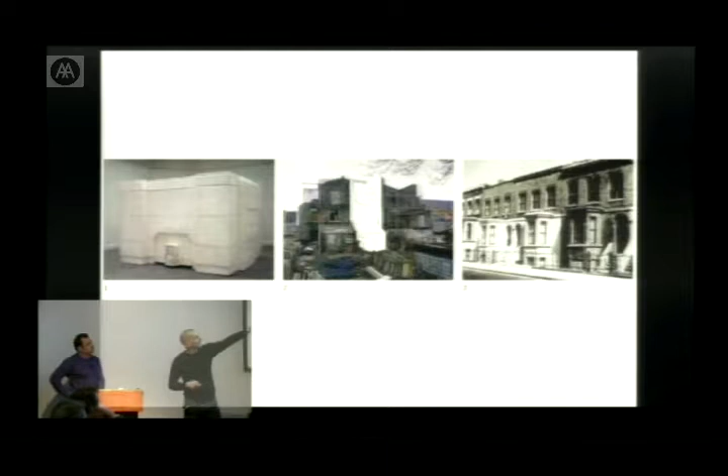That process took her 4.5 months to do with the room called Ghost. She wanted to do the same with the house. Eventually, Artangel found a house in a perfect location, which had originally been in a terrace street, you see on the right, and was now left in the middle of Victoria Park in northeast London, with the central house there intact. The one on the left-hand side was completely derelict, and in the one on the right, somebody was living.

They convinced the guy, they moved him out into new premises, and they got the council to agree that they could take on that central space to do this arts project. The difficulty was, they had 3 months to do it, and they had to get planning permission for a temporary project, and 3 months was what covered temporary planning.

So, having taken 4.5 months to do one room, the idea of building the same pieces, taking them away, stripping the house down, building a frame, and then putting them back together again was impossible. And we came up with the idea of something that I had discovered when I worked in the Middle East. When you get problems in concrete, you spray concrete onto it, called guniting, to repair the surface and then smooth it.

So we created some models for it. If you imagine, when you take away the outside of the building, the floors, there's nothing holding them together. So we had to come up with a system where the wall was skinned in concrete, the structure returned, and you connect it through bolts, so it's stiff. So that was the house, and they began to clean up the inside of the house, with scaffolding around the outside so they could prepare to do the building work.

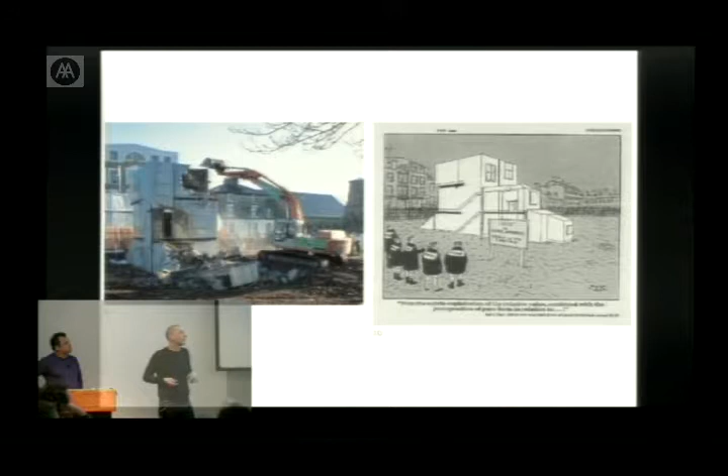So there you see, you don't really get the engineering. It's a thin shell. A lot of people thought it was solid. That was it when it was finished, and that's what it looks like now.

Another artist, Juan Munoz, who sadly died shortly after he completed this project, made the second installation at Tate Modern, which we were lucky enough to work with him on, called Double Bind. And what it did, rather beautifully I think, was create a series of 3 different layers, 3 different scenes. This one on the top surface, you see here, was using false perspective.

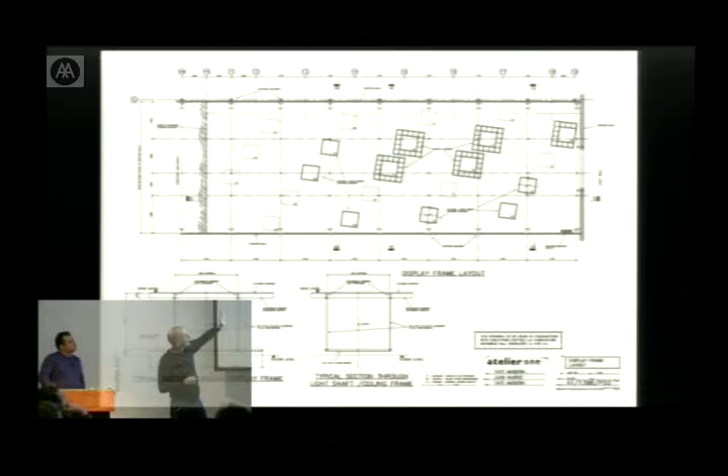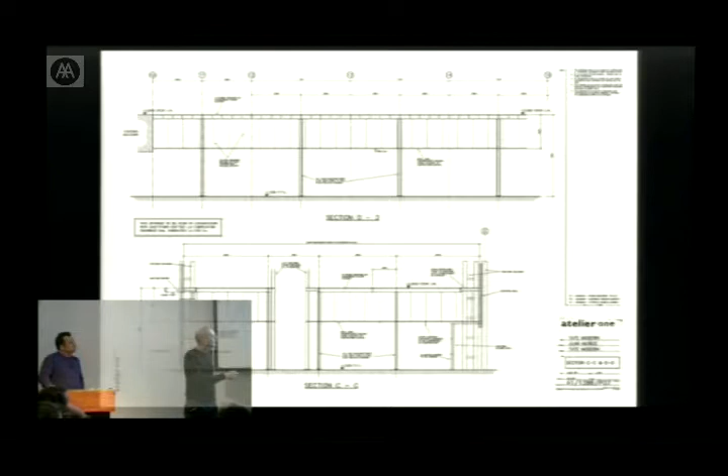Some of these are a series of holes which actually pass through a floor he created. Some of them are false and just painted on. And you can see at the back there, these 2 frames. They actually have lift cars that climb up and down the building. So you see the plan there that we developed with him with this false perspective. The section, you can read here: this is the upper level, this is the floor of Tate Modern, and this is the ceiling. So within this, he then created this other world.

One of the true holes through the floor. And he created these very, very strange worlds that you could see from the basement, the level below, which was very dark and very much like a car park. But these strange environments were very typical, an idea that went through all the work he did.

This is a project that we did with the artists Langlands and Bell. And what was great about it for us was the client put together teams of artists and engineers to develop three different bridges down at the Paddington Basin development. And we met up twice just to show various bits of work that we'd done and express our interest and experience in bridges.

And I think what was great for us is that, working with artists on a bridge, they had no preconceived ideas of what a bridge might be. We were doing structural diagrams of arches and masts and cables and that sort of thing. And they were drawing screens and looking at the filmic qualities of the space.

And so, this is the completed bridge, but I think one of the most important things for them was looking at the effects of the layers of the glass and how that could create moire effects, and how the people using the bridge could actually create shadows, which, depending on how it would light, would be enlarged across this screen. So it was an animated screen across the bridge.

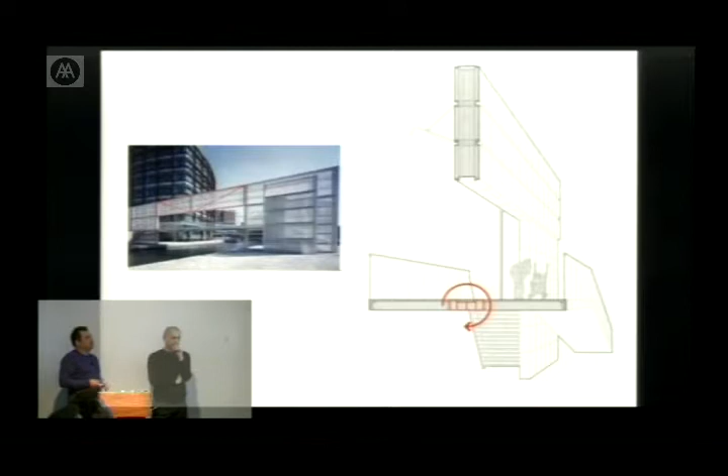And what we've hidden in the middle of that, you can see it's highlighted there in red, is just a series of very large tubes. They don't look big in the context of the bridge, but they're actually this sort of size. And that takes out any rotation. So the stiffness of everything, well, we were trying to hide it. And I think it is very beautiful, and it does screen off various areas of Paddington Basin.

For Mason's Yard, this was the second project we did for White Cube Gallery. When we got involved, it was an electrical substation in Piccadilly, and it already had a basement, and it had two floors at the time. And the original idea was to renovate the space, use the existing building for the gallery, just clear out the existing basement. It became clear fairly quickly that the spaces weren't big enough for the art that they wanted to display in there, and they consulted a number of the artists.

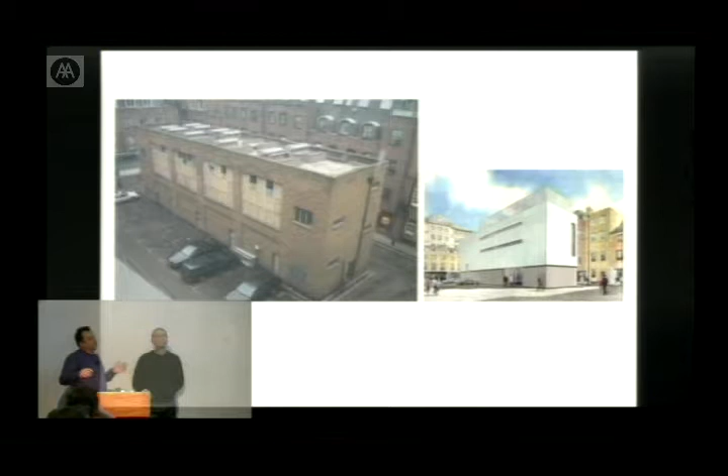They have a list of people like Damien Hirst and Antony Gormley and many well-known British artists on their books, and they're very careful in consulting all of them, to see what they think of the spaces and are they big enough, the heights, the proportions, and they actually build mock-ups of the spaces off Brick Lane in the warehouse there, just to make sure that everything's right.

This is the finished building. I think I'm right in saying it's the first new building in Piccadilly for 30 years. So planning took a very long time. The other difficulty with this is that the only route into Mason's Yard is the road that goes through, but the opening's about 8 feet wide and about 7 feet tall. So everything for that building had to slot through this little opening. So technically there were a lot of things going on.

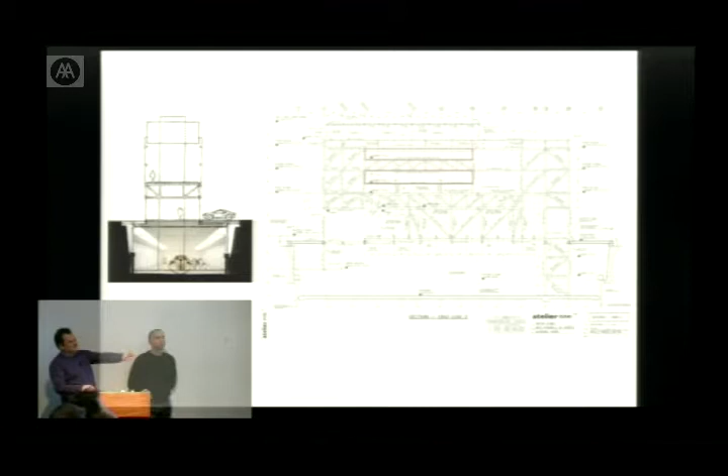So we had all sorts of steel trusses, you know, and these strange load paths that I think it was nicknamed the hockey stick truss for once. You know, it bends round corners and it was all over the place. But effectively, at the end of it, you can see on the left there that the road is hanging from the building. That was the only way we could do it, which is the first I've ever done, you know, something like that. So you don't really expect that. There's sort of all the cars' load going up the building and down through it, but that's what we had to do here.

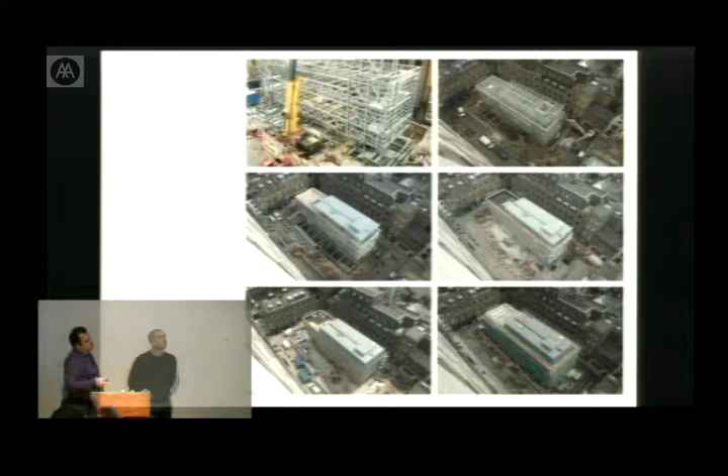So the sequence of it, I mean, there's a huge amount of steelwork in it, and these are the sort of time lapse as it was put up. I mean, it was a big, heavy engineering project. This is the basement on the left, and the existing basement wasn't deep enough. The width was increased and the depth, and so you can see we needed all this temporary steelwork to prop the sides of it while they piled down and excavated even deeper.

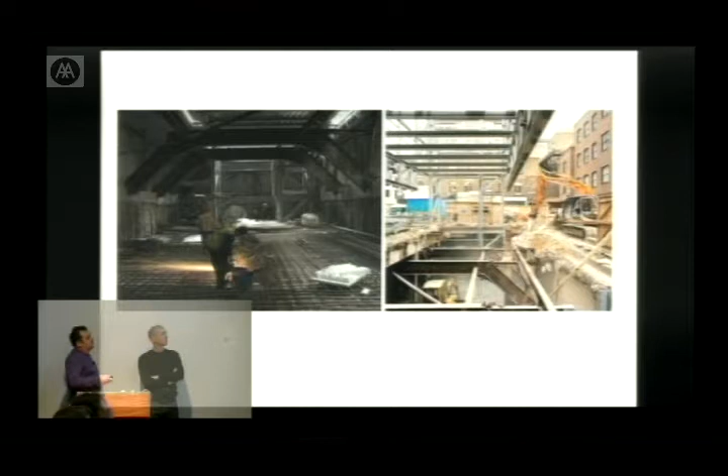And on the right, you can see that's the sort of, if you like, the clear elevation. That's where the road goes back in. So once the road goes back in, it hangs from this edge you see on the right. And that's the finished space. And it's quite extraordinary, actually. When you go there, you walk in the front door of this quite slender building, and you go down the stairs, and it opens up into this space, and it's slightly disorientating. But, you know, that's what's behind it.

I mean, if you imagine this thing ultimately is going to be in bronze, we need to understand the distribution of the weight, and it's a three-dimensional form, a kind of amorphous three-dimensional form. So we sliced it up into little pieces and then applied a weight to each of those pieces, which allowed us the correct distribution. That also gave them a mechanism to form effectively the base model, the former for the baby.

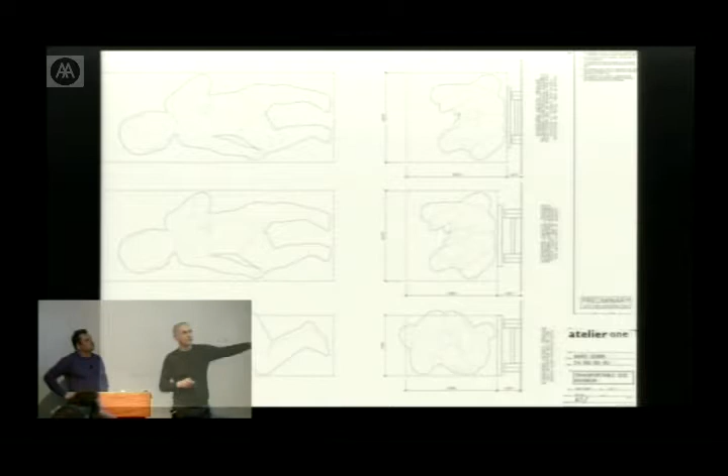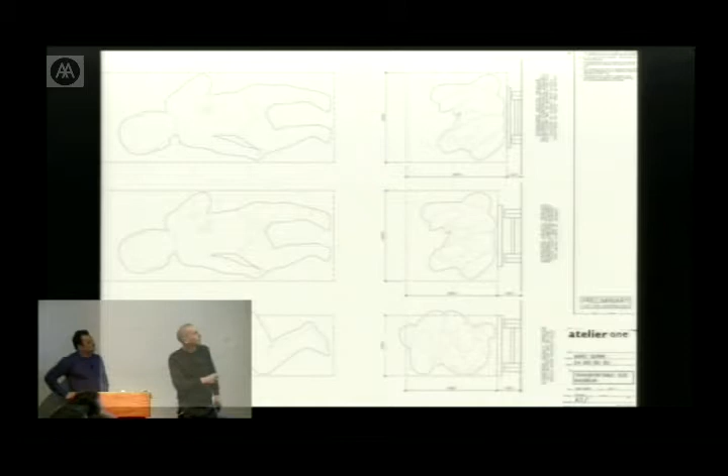The thing that dictated the size of the baby that we eventually were able to have was how big you could get it as a single baby onto a lorry. So what you're looking at here is studies of trailers, and here you can see a little bum poking out. That's too high. Too wide. So we ended up with it 9 and a bit meters long, I think it was, ultimately.

So how do you make the object stand on its own as a heavy object, particularly the way Marc wanted to do it? We had to kind of string inside it this spine, this structure, which has a series of arms off it, which is in steelwork, very strong tubular steelwork, and each of those arms is connected to the outside skin of bronze. It means that the bronze doesn't have to work very hard, because basically that torso is supported from this steel structure. The head's pretty stiff, that's fine. The legs are pretty stiff, that's fine.

We took the idea the same way the Statue of Liberty works. It's copper on the outside, steel on the inside. The connection between it is soft, because they expand and contract differently. Same detail here we used.

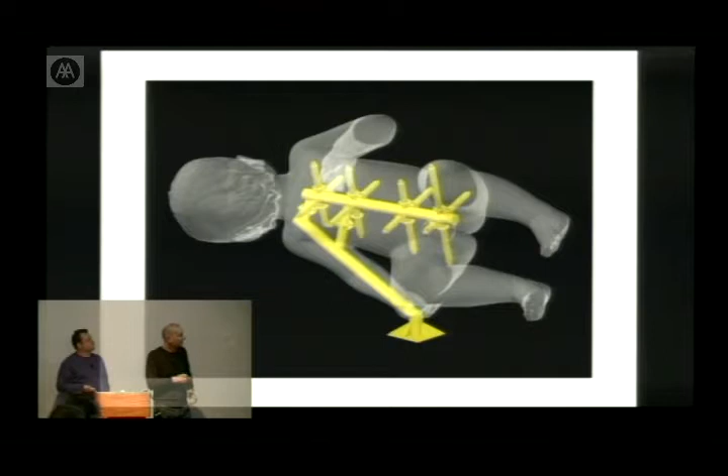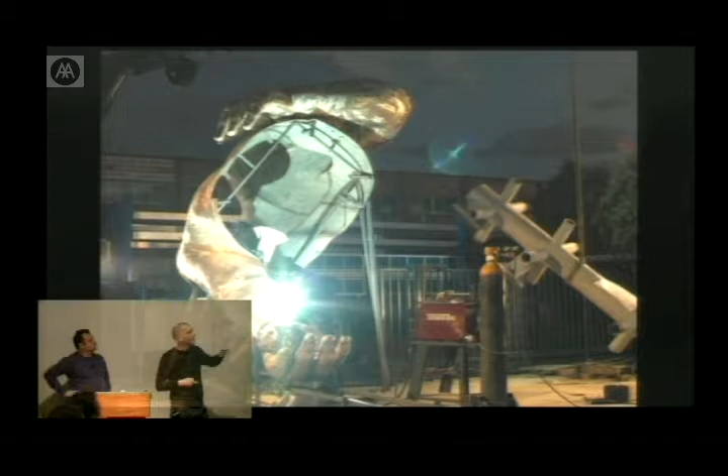So this 1/4 inch skin, 6mm skin of bronze, they cast it in a series of pieces, welded it back together, stuffed this very stiff frame inside it, finished it, wrapped the whole thing up, stuck it on the back of a truck, and it fitted, as we said it would, and then they put it in Chatsworth House.

But it sits on its hand, and it's 9.5 tons. So you need to know the environment you're working with. You need to know that sometimes you have to deal with that environment and how to deal with it.

And in Singapore, we worked on a project which we won with Michael Wilford. Stirling, I think, when they originally did it, had won a competition to design the new cultural centre in Singapore. Years went by, it had evolved. Wilford was on his own at this point, and they were having trouble with the facades they were proposing. These are 2 theatre buildings, the Lyric and a concert hall.

And the idea of those buildings was, they build the internal volumes, which would be the stage, the fly towers, the seating and everything. That would all be designed purely, absolutely pragmatically, to do exactly the best job they could, optimizing everything. And then for the architecture of the building, they'd throw the shroud over the top of it, which is what you can see there.

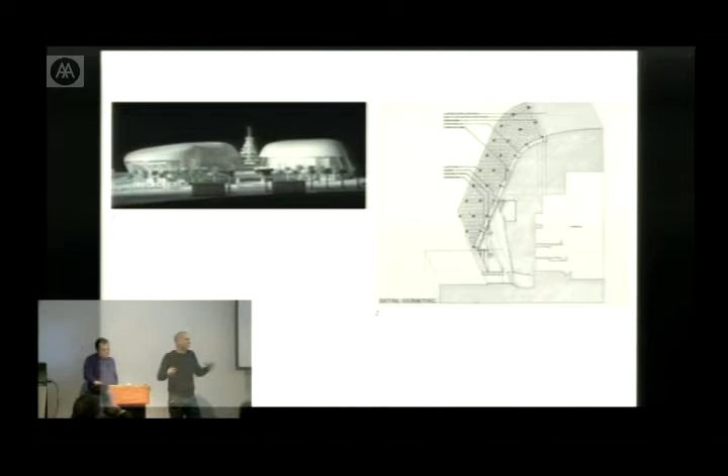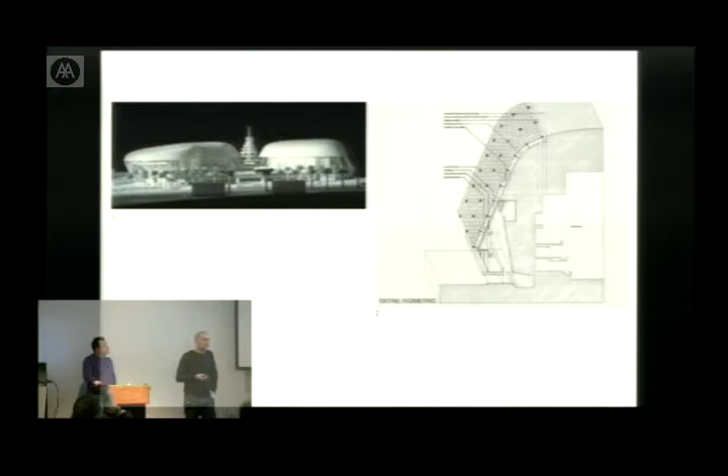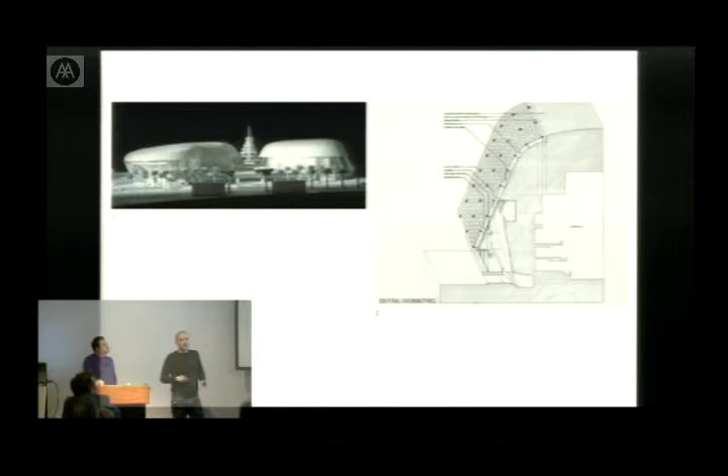And what we noticed immediately, each of these forms sits 90 degrees to one another. It's 1 degree off the equator, so it's very hot. The shading system they proposed, on a glass skin, were these ceramic discs, but they were uniformly distributed over the whole surface. Something not right. If the sunlight is moving across from east to west, each of these forms 90 degrees to one another, they're going to see the sun differently. We did some studies and explained to them if you have a shading system over a glazing system, you need to cut the sunlight down. It cannot be uniform, it cannot be working.

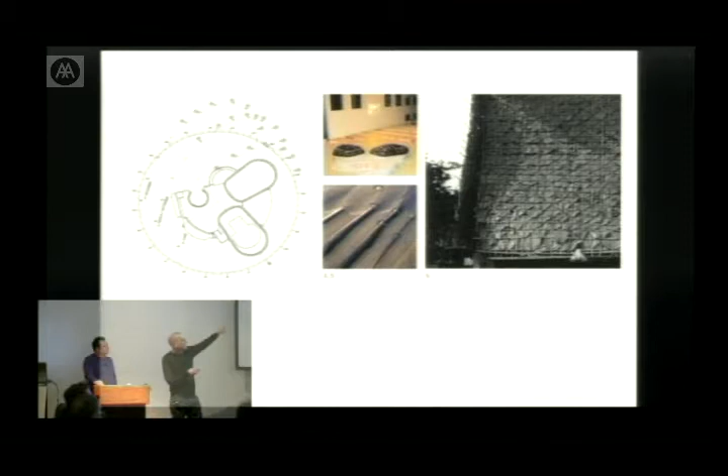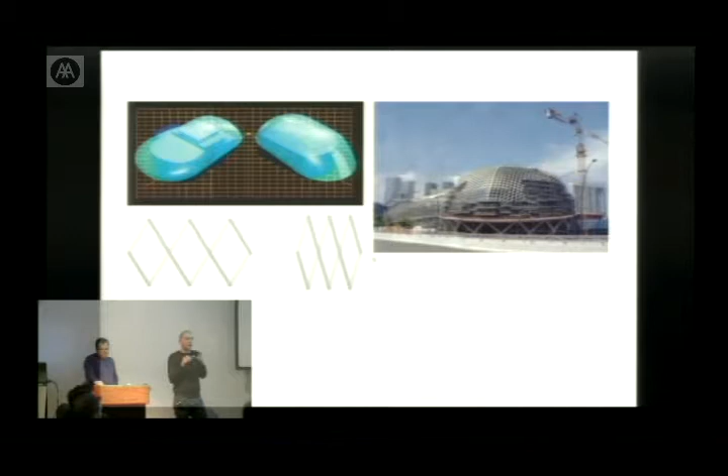So we started to look into indigenous architecture, the idea of overlapping. This is using leaves to provide waterproofing. Various other steps we took, looking at the sun paths, wind tunnel testing the forms. We came up with these 2 forms, which are now inflated, and they use membrane structures techniques to form them, which allowed us to suck them in where you didn't need larger public spaces, reducing the internal volume, air conditioning, etc. The structure was a diagonal grid, which could lozenge. As you change curvature around it, it allows it to open up, just like a sieve will do. The internal forms were built.

Eventually, the shading system we came up with were these beaks, much like the leaves idea of giving waterproofing to the building. They overlap one another from above. But as you can see here, as it's a folded panel, there's a space of glass behind, so you can still see through.

Now actually, because of this point I made earlier about the position and the sun moving, these shading devices are different depending upon where they are around the surface of the roof. So if the roof is relatively flat, and you've got glass on it, you need a very large covering, because any openings set back will see direct sunlight. As it turns around and leans more vertical, then one overlaps the one below, so actually you need less covering, so the shading devices can be smaller. And finally, when it's leaning back in on itself, those shading devices can cut right back, because the overhead sun, which is the problem, midday, doesn't see the surface of the glass, so it doesn't see direct sunlight.

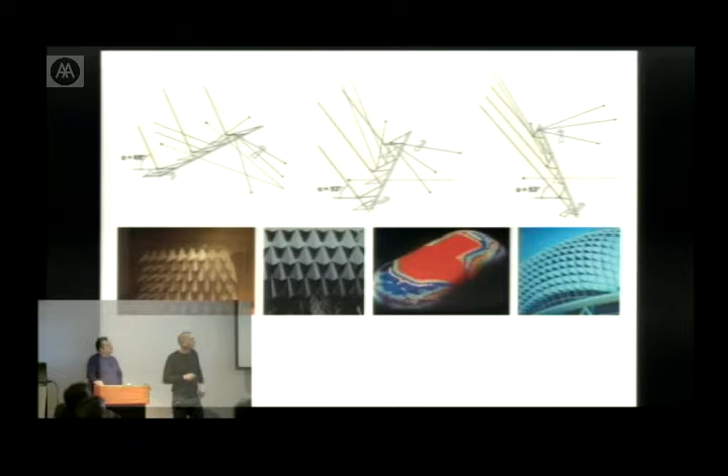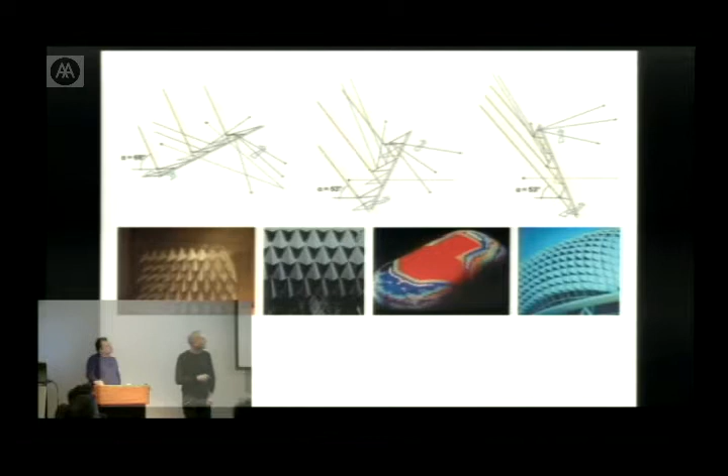Those shading devices were defined in a whole development of drawings, but this is a kind of map of shading devices on one of those forms. That was the model we built in our office of one, and this is the finished object. Around here, the cladding is solid, there's no glass because that's where there's no public access. And you can see these shading devices, so they change around the surface following the structural grid. And then down at these low levels where it never sees direct sun at all, there are no shading devices.

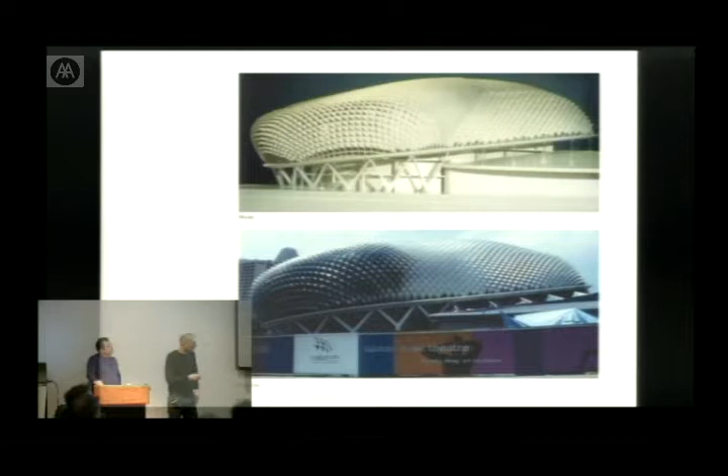From inside, the whole idea was that if you look up, then you see shading devices. If you look straight, which is what you want, so you have the views out, you see structure or you see glass, nothing. You don't see any shading devices. The shading devices are 90 degrees to that view.

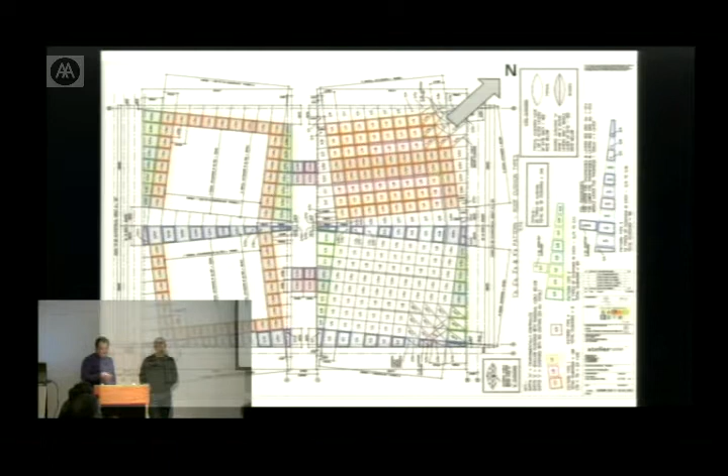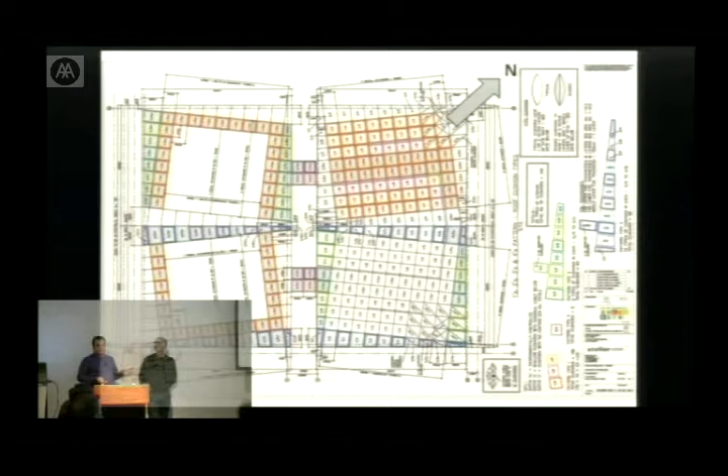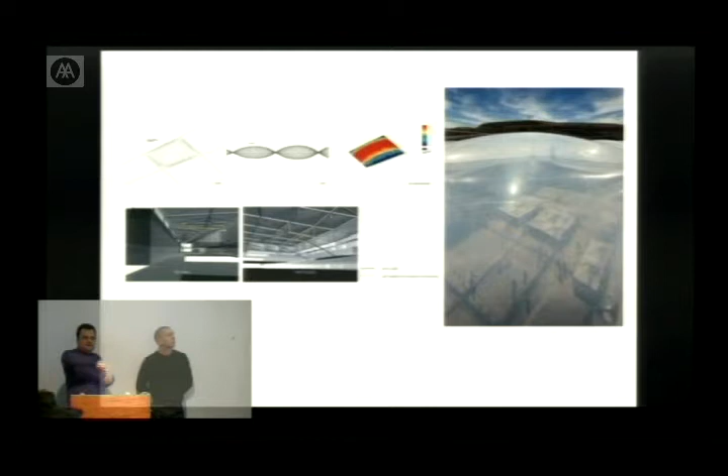You get a feel for the scale of these things, and what's important is the bigger they are, and ETFE is not a very strong material. It's just a sort of plastic, and there's no reinforcement in it. So what you need is as much curvature as possible. It's rather like holding the washing line: the flatter it gets, the more force it takes to pull it, and that would damage the thing. So we needed as much curvature as possible. You can see our analysis. These were not elegant cushions. These are big balloons with lots of form in them.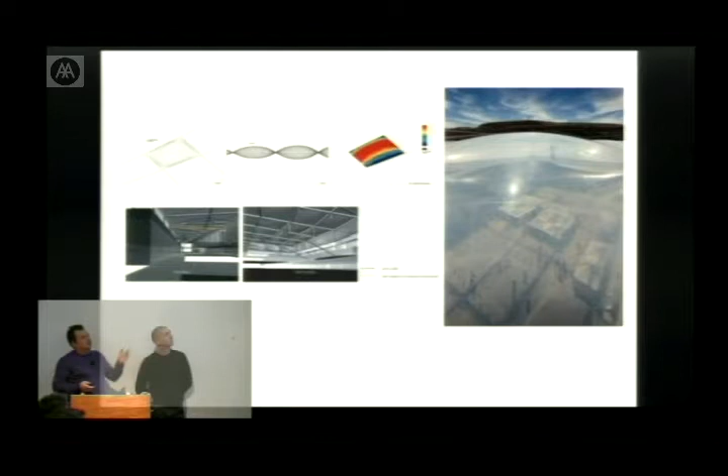So what we were trying to do, working with Transsolar environmental engineers from Germany, is look at how we could combine the structural idea and this idea of shading and protecting from the sun. So we looked at playing with the surfaces of it. If you look top right, we've used opaque fabric on the top right and transparent fabric on the bottom left. So in one direction, oriented to the sun, it cuts out all solar gain, and in the other direction, you still maintain views of the sky. So when you're standing in there, you can still see the really beautiful blue sky of Lisbon, but it cuts out an enormous amount of the solar gain.

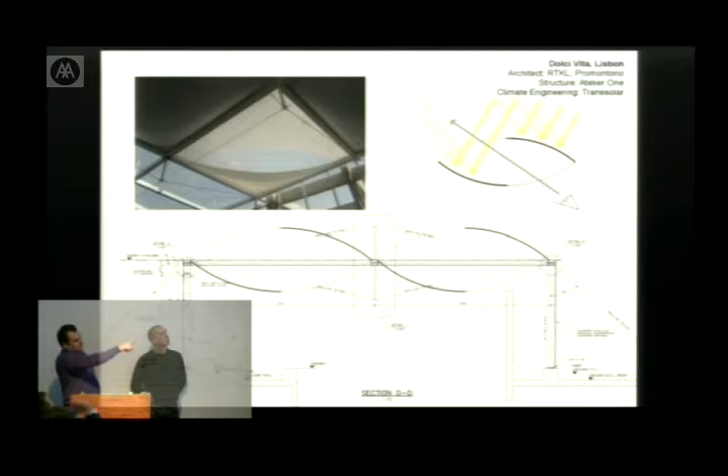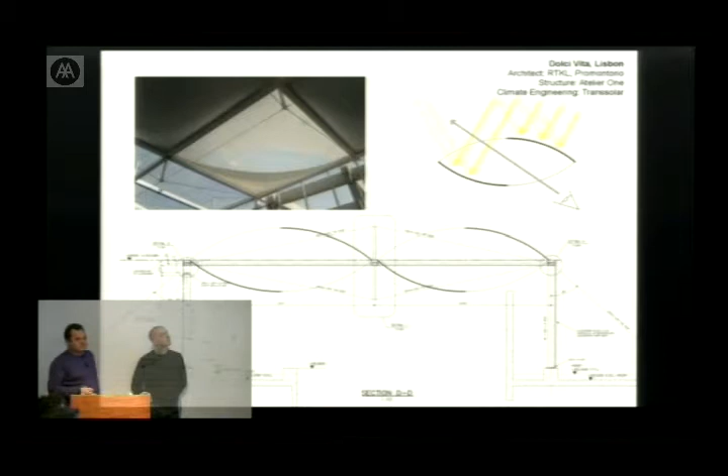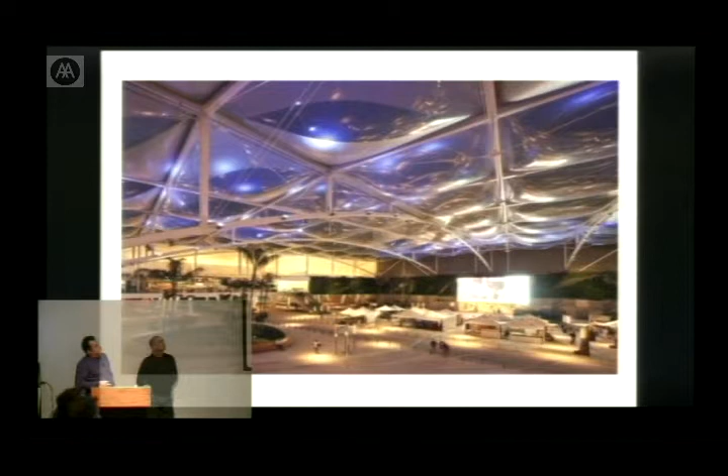And so you can see our section through the building at the bottom there. It's sort of a Victorian idea of the warehouse and north lights, but we've just taken it into a cushion. So in the plaza area, this was a sort of 70 metre span across there. And the same thing, you can just make out the lenticular openings in the cushions there.

And the various views. It gives a huge amount of daylight, and it reduced the loading for all the air conditioning. The other thing I would say on this, it was the first time that selective coatings have been used on ETFE. On glazing it's very common to have low E coatings and so on, and in the past that's been a restriction on the use of membranes, that there's very little environmental control.

But as part of this development, we researched with the manufacturers how to coat these materials. So the performance of them is pretty good. The structure we just kept as simple as possible so that you read these big cushions.

This is also about the sun, but not quite the same idea. Marc Quinn phoned one day and said, can you make a rainbow? The great thing about being an engineer, particularly some of the stuff we do, is it's nice to study again. It's nice to get involved in a project where we have to go back and learn. And I did go back to university in Brighton and went to the optics department.

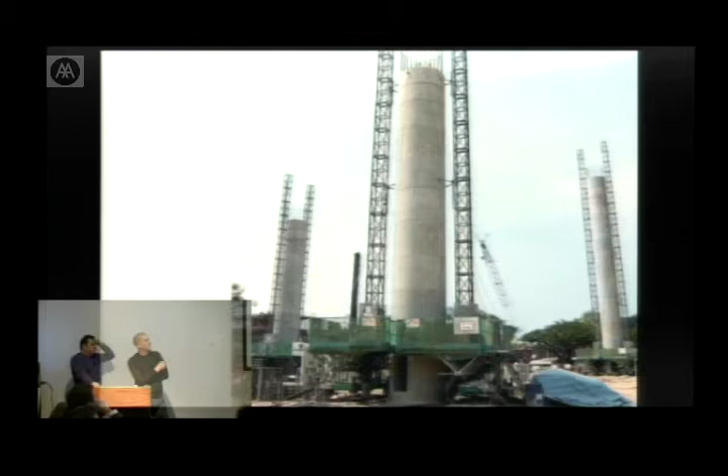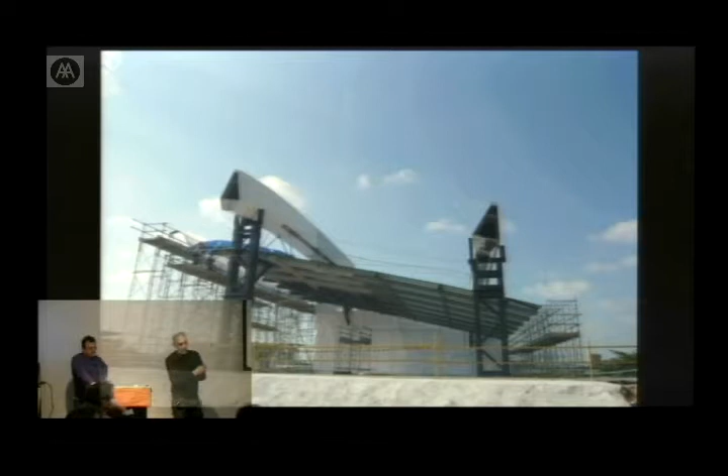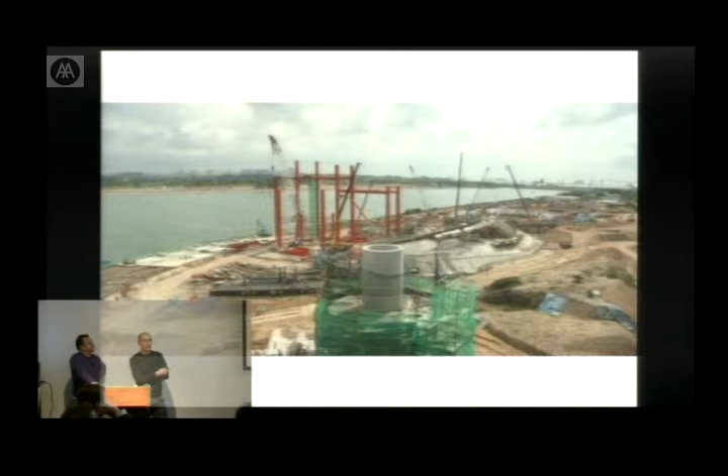Squint Opera made the amazing film, which we were lucky enough to go on and win and have been enjoying for the last 2 or 3 years. These are the cores of the super trees, which are nearly complete. The mock-up for the conservatories, which we've been working on hard with Wilkinson Eyre and Atelier 10 for the last God knows how long. The view of the site from one of the super trees showing one of the bases of the conservatory. So well on the way to a $1 billion garden it is.

I think we just want to show the other end of the spectrum of winning a competition, which is a project we did with Ian McChesney. Sometimes you do a really beautiful image for the competition win, and then you've got to build it. That's when the process starts. Given the scale of it, the program ended up being longer than Gardens by the Bay, or the proposed program on it. It went on for 5.5 years. But the process was very enjoyable. The budget's very low, which is often the case with these sorts of projects. But we kind of enjoyed the DIY nature of it.

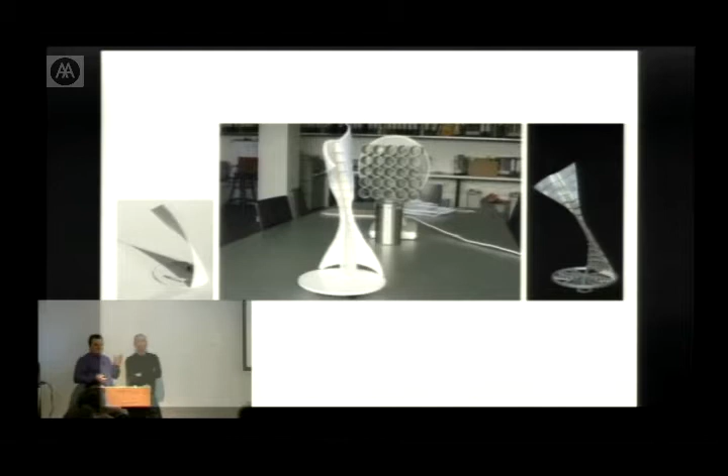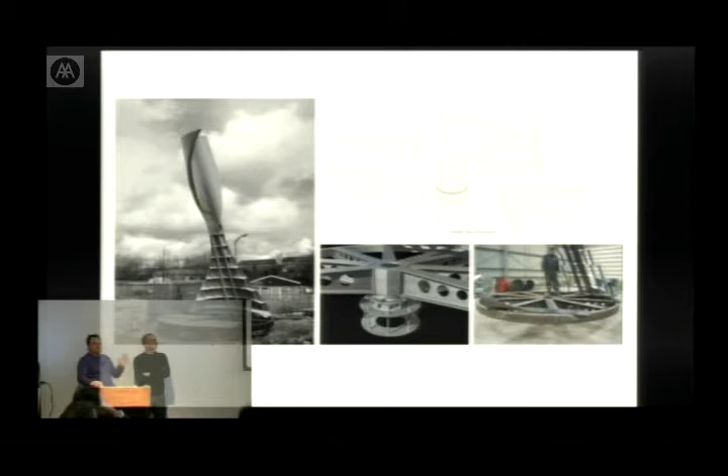We built our own wind tunnel in the office using desk fans and cardboard models, and we had saucers with water and the things spinning, and used red string instead of smoke to understand the way wind would pass around it. So this is the prototype on the left, which was done in a car park in Blackburn, and it wasn't particularly glamorous, but we actually got it right from our wind modelling to building the prototype. We didn't make any amendments to the full size one.

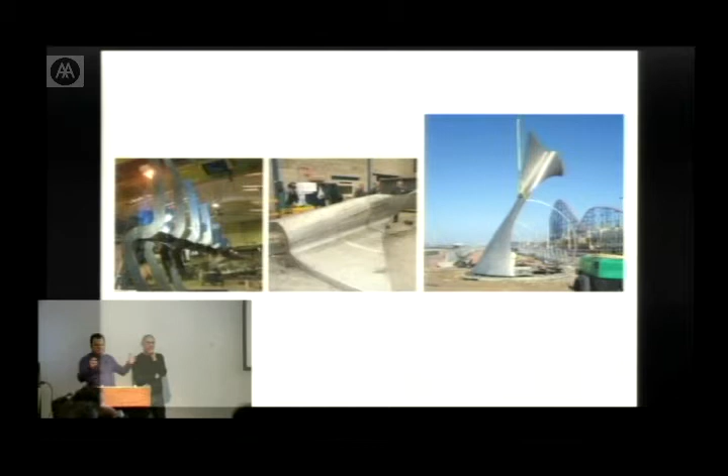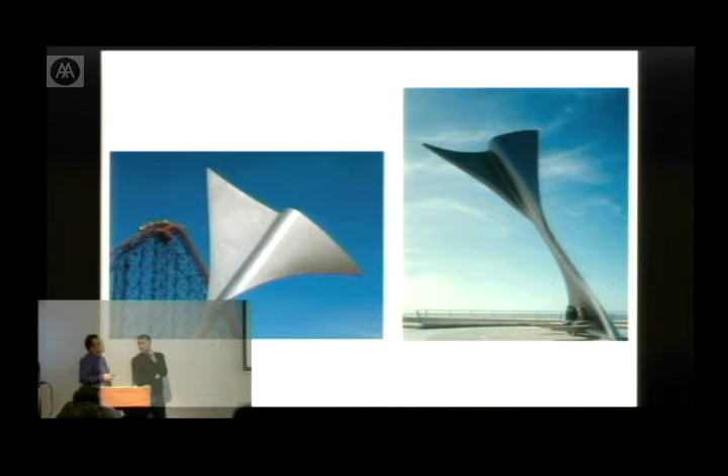So going into Blackpool, we rationalised a few things from the competition. I don't know if you remember the image. The whaleback was a sort of curved element, and this one has a hidden straight line up the back of there. Little tweaks like that, to negotiate a budget. But I do think they look very beautiful, and they originally were proposing 3, and there's unfortunately only 2. That's all they could stretch to, but they are there on the seafront in Blackpool.

So sometimes engineering is kind of basic, and it's simply about showing off. That's what it is. It's up front, and you see everything. Anish Kapoor asked us if we'd look at this thing with him. There's a proposal for Chicago for a sculpture 22 meters across. This is the model of it.

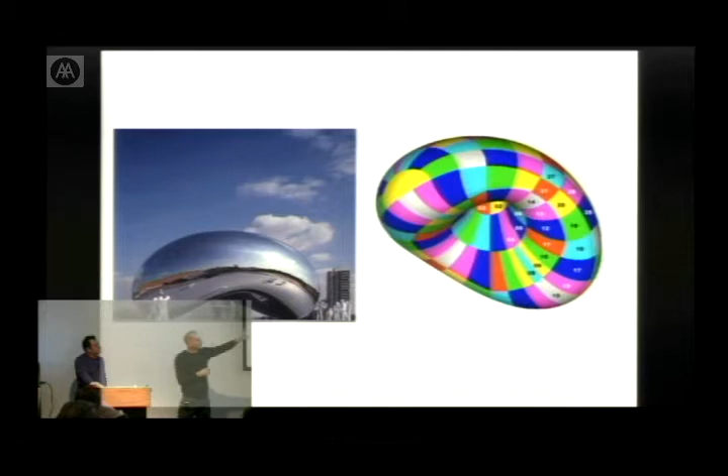Kind of not dissimilar issues to those that we've had with the baby planet earlier on Marc Quinn's, although they came the other way around. So this one chronologically came earlier. So we had that idea of breaking it up. First of all, forming the surface into forms that were describable mathematically. So we used spherical surfaces, then chopped it up into small pieces, so those pieces ultimately would be workable by the people building it.

Simple idea, as I said, from the Statue of Liberty. Structure internally, the armature to allow it. What that means is that this egg, 22 meters across, supported at close centers, could be very thin. The problem is as a single surface, a single form, it would have to be very, very thick and almost impossible to work with. So this allowed it to be thin, supported internally by a big steel structure that goes down to the foundations, and effectively the enclosure just doesn't quite touch the ground.

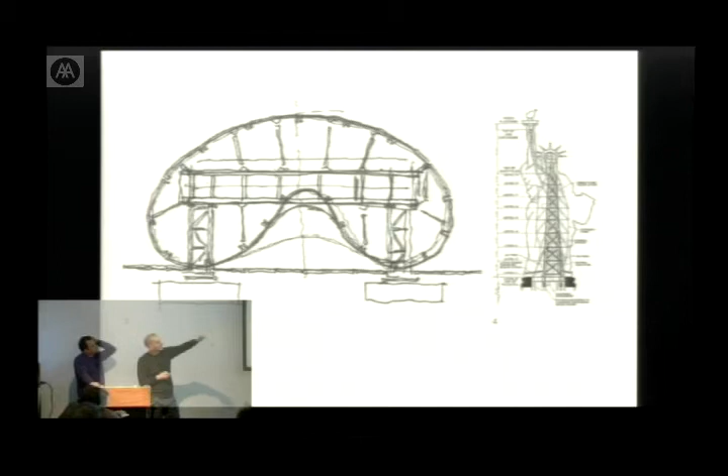The armature itself went in. The idea initially was to build the whole thing in the boatyard in San Francisco of a company called Performance Structures that we've worked with on other stuff before, and ship it through the Panama Canal, up the eastern seaboard and into the lakes and drop it into place in one go, but the time didn't allow for it.

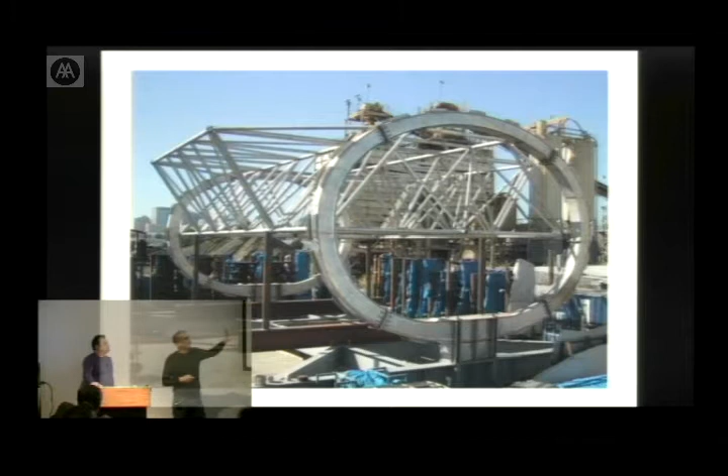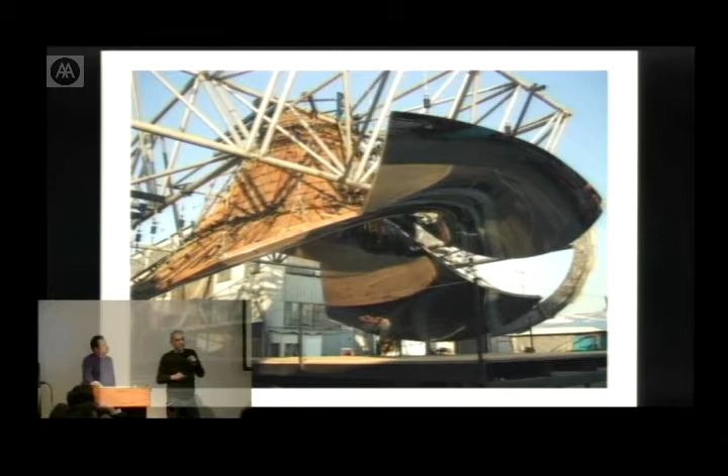So in fact, when it arrived in Chicago, the frame arrived first. They brought the pieces in individually, which came on subframes, and they were attached back to the superstructure, and then they were welded internally structurally, and then they were welded externally visually. And ultimately, when the thing was complete, it was actually opened, and then they closed it again, covered it up with a big tent, and they spent a year polishing it until they lost every single seam. So there are no seams in that surface.

$6 million, I seem to remember. But the contractor bought a machine from Boeing, a six-axis milling machine, which had never been used in anything but aircraft construction before. We used aircraft codes of practice for trueness for the structure. So you can see why it cost $6 million.

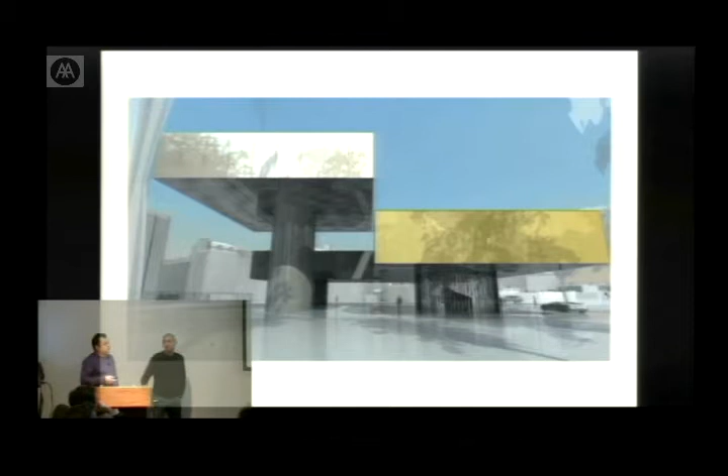This is a project we did with Marks Barfield again last year, and it's not yet been built, and I can't tell you who it was for or where it was, but I can just explain the principles behind it. The idea of it is that this part of the building on the left actually moves up and down. It goes from a height of around 4.5 meters, and it extends vertically up to a height of 32 meters.

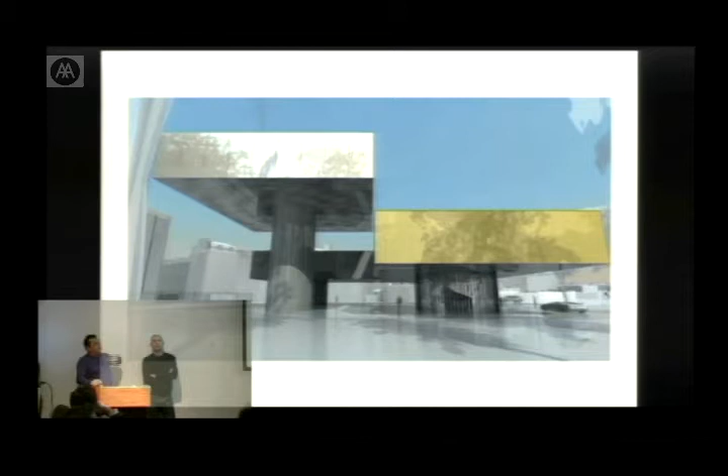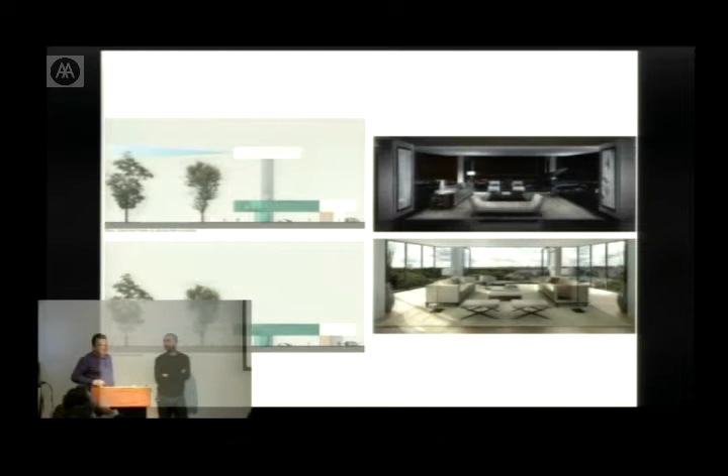So you see the diagrams on the left there, at ground level. And then it gives you a different view above the trees across this particular city. And so you can see in the bottom right corner the view from the living room once you press the button. I think these are our diagrams, and it's interesting. There's quite a bigger volume underground, simply to carry the piston.

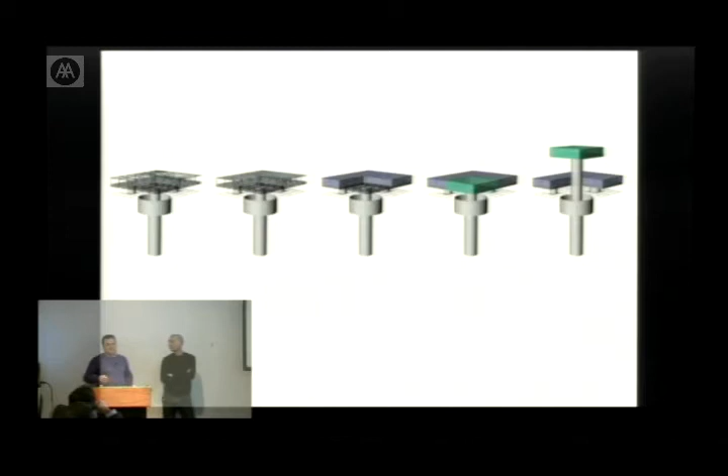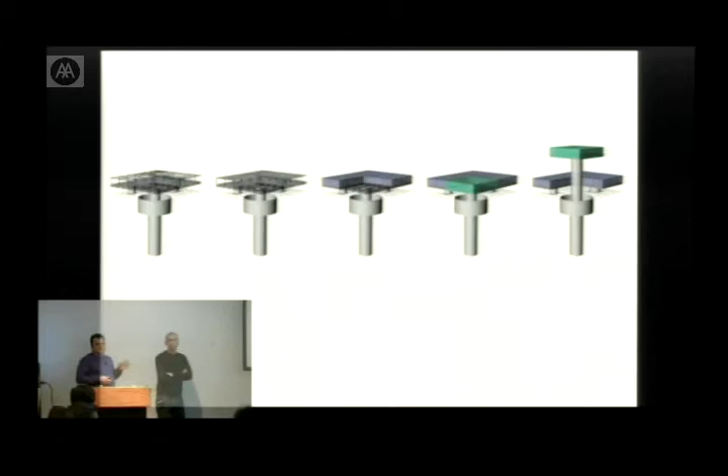So there's the structural diagrams of this big cantilever plate. There's a huge caisson that went down, and I think the depth of that was just under 50 meters, and about 7 meters in diameter of the main hole. And then you've got this chamber at the top, which is where all the mechanism is held. I mean, this wasn't just an idea. This was fully detailed and designed.

We had 2 options that we went to tender with on the mechanism for this. The first is using a sort of traditional drive system of 8 motors. You can see them positioned radially around here, and they're actually positioned at this level here. There's a massive counterweight in here, which in itself is about 200 tons of just plate steel, and that ran over pulleys up here and connected to the bottom of this mast.

So actually the weight of this was balanced by the weight down here, and so when you're driving it, you're only driving the weight of people inside it, the change of weight. So there's a lot of kit in there. I mean, a huge amount of safety issues that we had to go through.

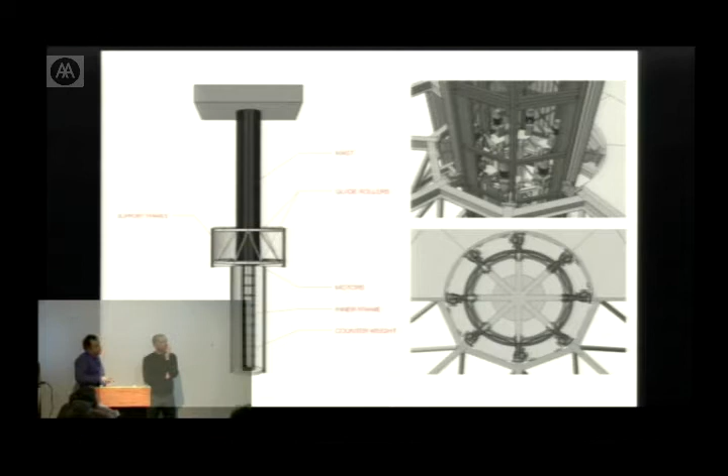The other idea, which was our preferred idea but hadn't been done before, was using buoyancy. So instead of the 200 tons of steel plate, we flooded the chamber and put a float down here, and it's basically displacement that lifts the thing.

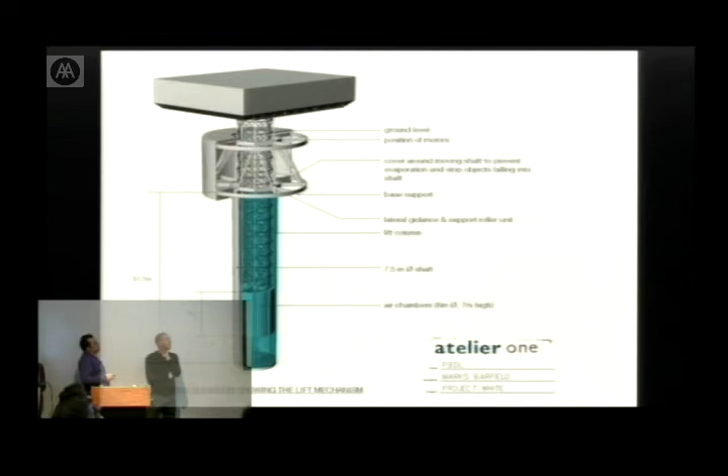And this thing was quite interesting. I really like the idea that if everything failed and you had to take off the brakes, this thing would actually lift. And there'd be a problem getting down rather than the thing dropping, which was quite a nice idea, I thought. So this is a model actually that Julia made. We still have it in the office, just to demonstrate the principle of it.

And I think there's something very elegant about the simplicity of just using a buoyancy device to lift literally over 200 tons. The people we were talking to do it daily in the North Sea. They just weren't at all amused by it, or didn't think it was clever, whereas we thought, God, we're such innovators, using it.

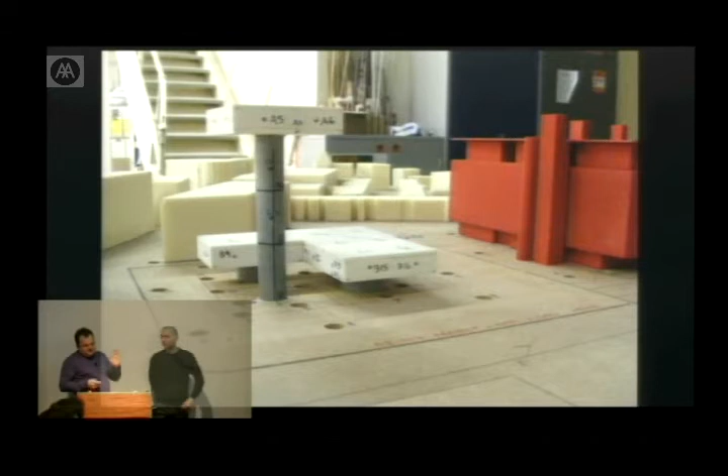The other side to this particular project was the sensitivity. The type of people who were going to use this building are not the most patient, is probably the best way of putting it. And so they were very concerned about the movement on this and wind, that as this thing travels up, the vibration of it might actually scare people. And so we had to do a huge amount of work.

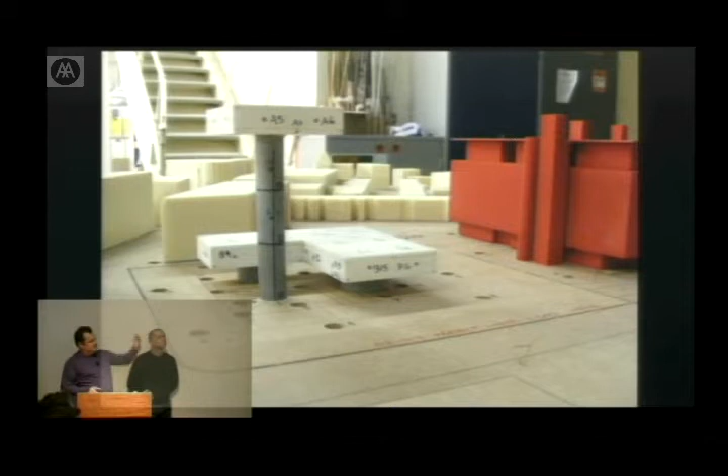It's normally used for the bridge of ships, and they practice driving down ship canals, and they've modelled every major passageway in the oceans, so they can go and practice before they give them a big tanker.

Whereas the company we work with, Motioneering, who are based in Canada, were helping us develop the dynamics of this thing. They use it for all the skyscrapers, the design of the dynamic systems. They consult all over the world.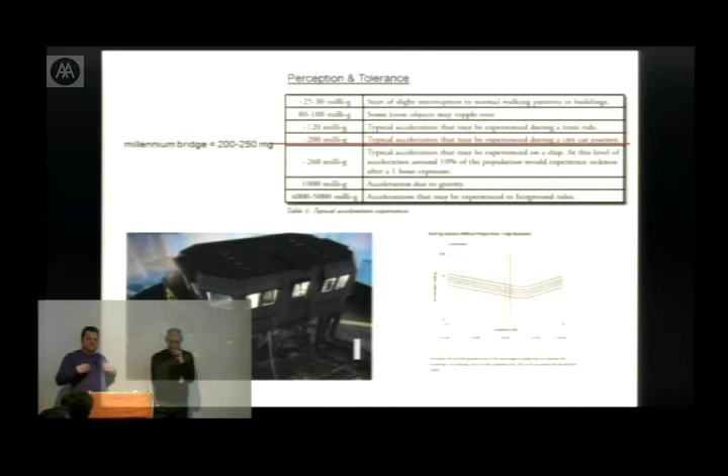And we took the client to this because from the wind tunnel model at various heights, we could put in the frequencies and the accelerations from the analysis and stand in that little room and feel it, because it's very difficult explaining to someone about movement, what's comfortable and what isn't. And I personally didn't want to take the responsibility for any surprises once it was built and they're all standing in there, oh, there's too much movement.

So we went there and we got everyone to agree what was an acceptable level of movement. There's a lot of grey areas in dynamics, and the table on the right at the top is to do with acceleration. So the accelerations where you start to perceive it. So we put a red line in there, so the 200 millig to 250 millig, that's the opening day of the Millennium Bridge where everyone was on their knees. That's what they were experiencing.

And where you're aiming for in a lot of buildings is less than 20 on a 10, 15-year return period. So one event in 15 years is less than 20, and they had 200 on the opening day, which is sort of bad luck. But now they've got it down to there.

And the graph down here, it's unfortunately a little bit small, but all these lines are, again, not everybody perceives the same degree of movement. So they have these graphs. On one of them is the natural frequency, which is the sort of movement like that. Up the side here is the acceleration. And in here, this is based on a lot of testing in Japan and Canada, where they grade it where 10% of people can feel it, or 20%, or 30%, or 90% can feel it.

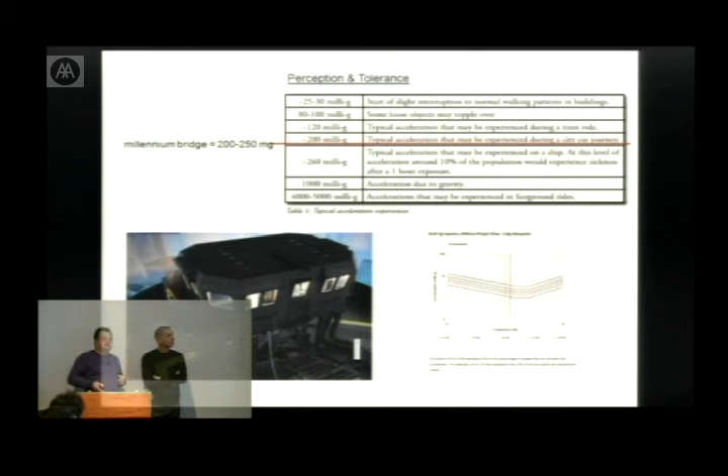So it was the first time we'd really explored this area, and it was absolutely fascinating. And I enjoyed St. John's as well. This is what Motioneering then designed. This is the damping system.

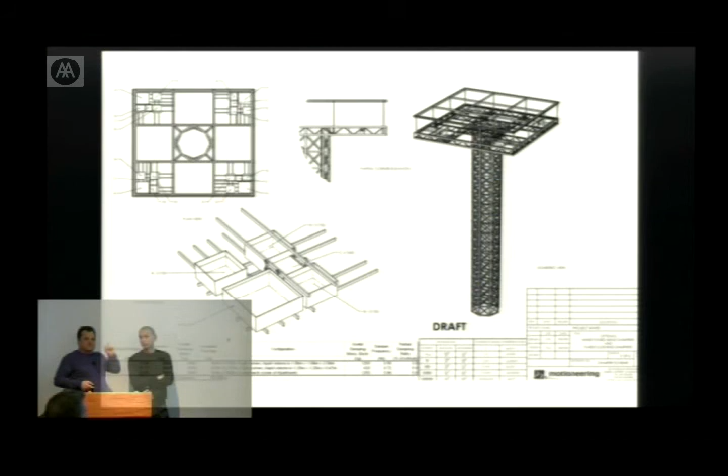You can see in the corners here, there were lateral modes of movement, and then there's a rotational mode. And so you position these away from the center of rotation, so they're effective for that, and also at the extremes and the corners. And basically, they are just tanks full of glycol, which is just a liquid, and they're different sizes, so each of those basically cancels out a different frequency. At the moment, it's being promoted for various different sites, and so it's looking for a view all over the world.

So this is one that we did with a design company called Free State, a couple here tonight.

And Beckham surely puts this World Cup tie beyond the reach of Wales, but what an explosive...

The idea, it was for the last World Cup, and it was a campaign for Adidas, and we were looking at physical installations in and around the ground, and we started looking at the profile of the free kick, and there was this idea that in each of the locations in Germany there could be a competition to choose your favourite free kick. We would then work out the profile of that, and then we'd build it.

And this was the one in Berlin, and it's a 77-metre free kick with large footballs on it, and it's sort of simple, but it's about advertising. It's the front page, and I thought it was genius.